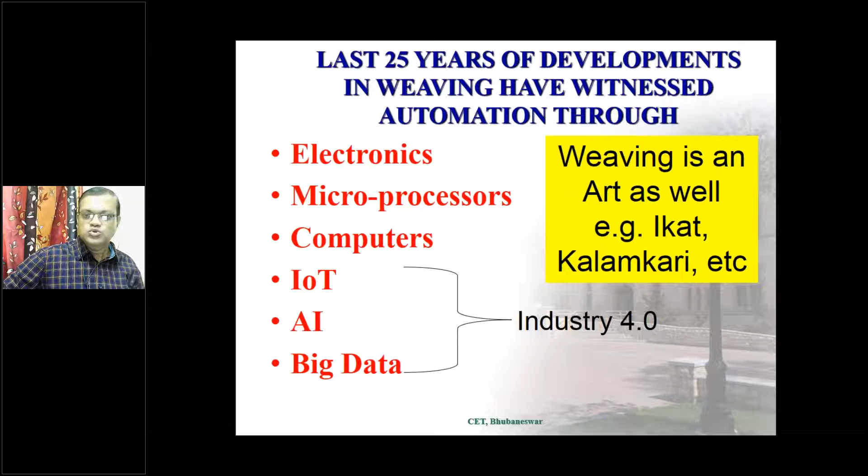We can see the classifications based on weft insertion system. Everybody, almost all the faculty members of textiles who are participating, they must have known it. Of course, the interdisciplinary faculty members should know what is the basic difference between shuttle and shuttleless weaving.

The first one is shuttle, and all the rest are projectile, rapier, air jet, and water jet. With advancement of technology, we have reduced the weight, reduced the noise, and come through the sustainable stage. Another classification is based on the source of energy to drive, that is power looms or hand looms. Power looms are again shuttle, projectile, rapier, air jet, and water jet. So obviously, when we consume power, we have to reduce the power requirement and increase the production.

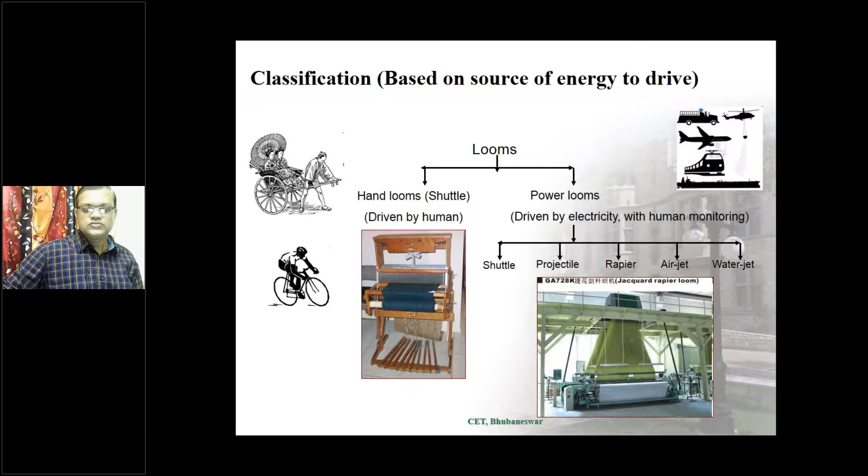This is the disadvantage of shuttle picking. That is the first step that came up in 1971 to make the system more sustainable, to reduce the weight, to reduce the energy consumption, to reduce the noise generation.

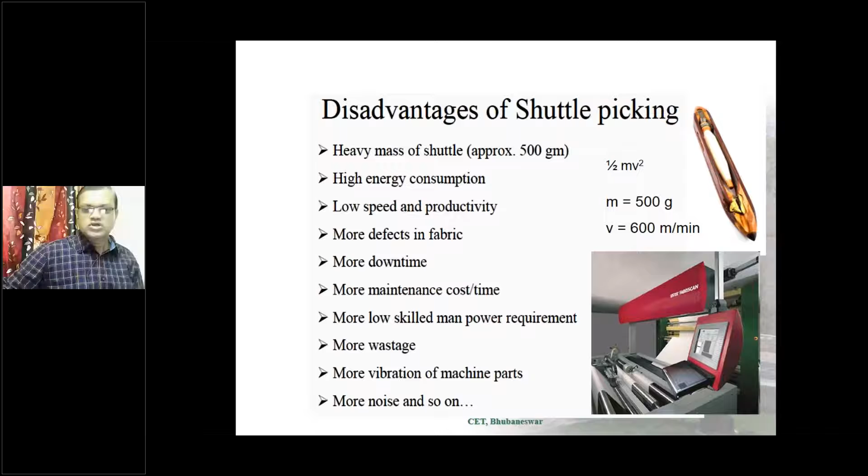So with all these disadvantages, the concept of shuttleless weaving came, which eliminated unnecessary movement, eliminated the movement of the weft package, and minimized the power consumption to improve quality of fabric and to improve the productivity.

This I have already discussed, and since a lot of things are to be discussed, I would like to skip it.

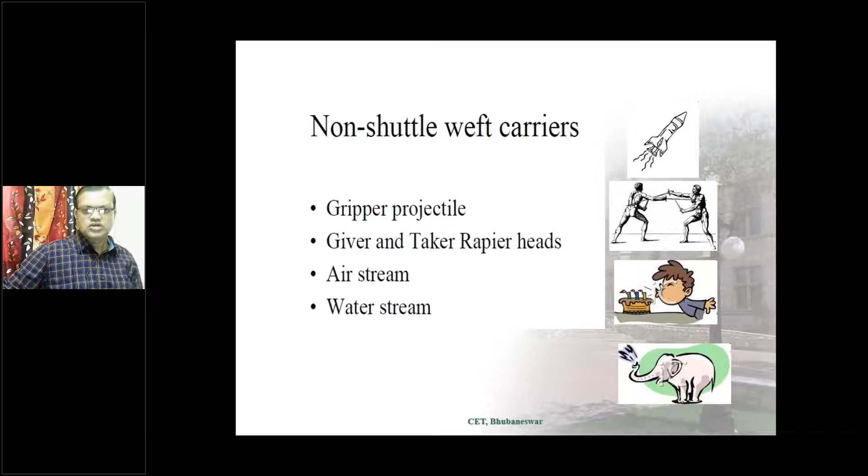The development of shuttleless weaving, we will see, started in 1971 for multi-phase, and commercial breakthrough came in 1998. However, for rapier, air jet, projectile, and water jet, the commercial breakthrough started somewhat around the 1950s to 1970s.

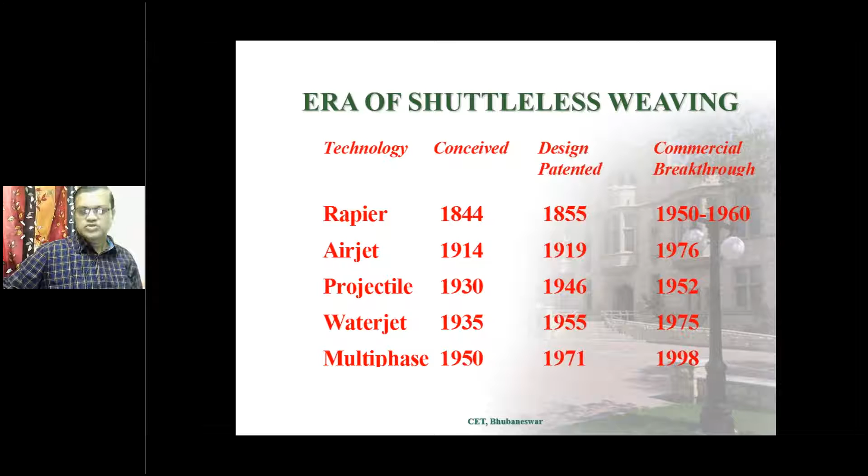These are the weft insertion rates, that is at what speed we are producing fabric, meaning the weft is inserted at how many meters per minute. You can see the highest WIR is achieved in multi-phase weaving, having 5,500.

But to the utter surprise, this multi-phase weaving has not become sustainable because of its inherent limitations of repairing of yarn in weft direction as well as warp direction. So multi-phase weaving, though highly productive and technology savvy, still has no takers because of its certain limitations in manufacturing of fabric.

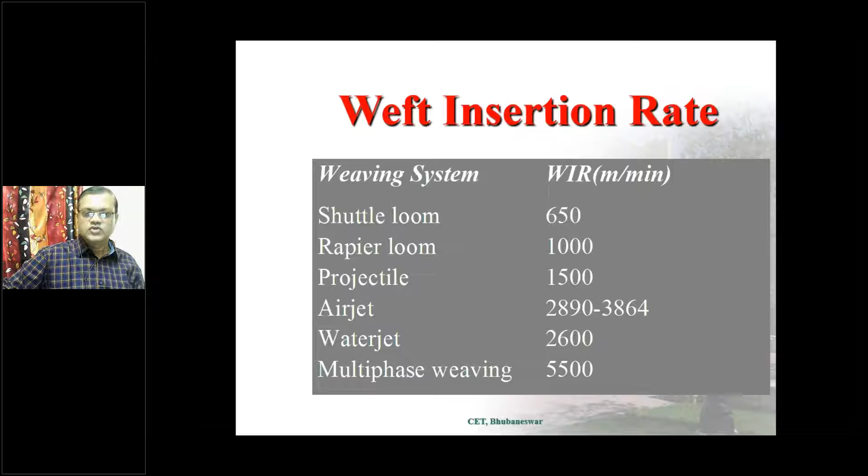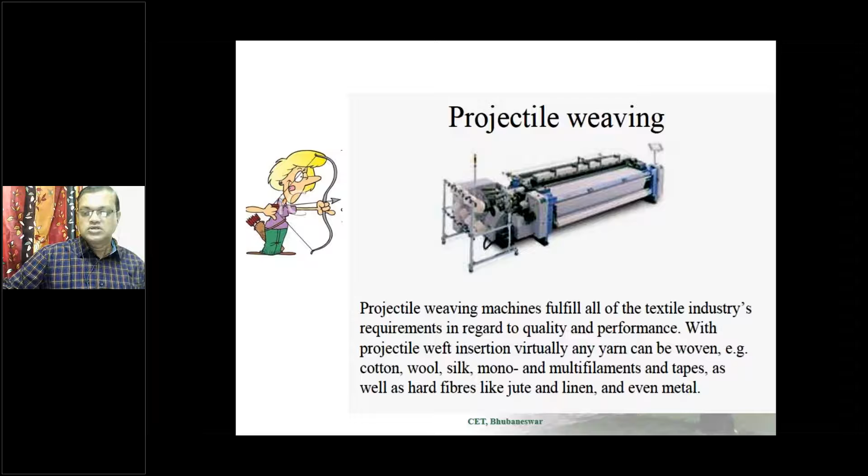The first breakthrough in shuttleless weaving came as projectile weaving. Projectile machines fulfill all the textile industry's requirements in regard to quality and performance. With projectile weft insertion, virtually any yarn can be woven, from finer to coarser, to spun, to filament, as well as tapes.

The projectile machine is characterized by good productivity level and high operational reliability. These types of machines are useful for weaving higher width fabrics and multiple fabrics having the same type of weft.

Projectile weaving is quite robust and technologically mature engineering. It gives the textile industry the following advantages: low power consumption, no material loss because we can produce any type of selvage, and the tucked-in selvage is its major specialty, top reliability, functionality, and ease of operation, low servicing and machine costs, and long-term retention of value through upgradation.

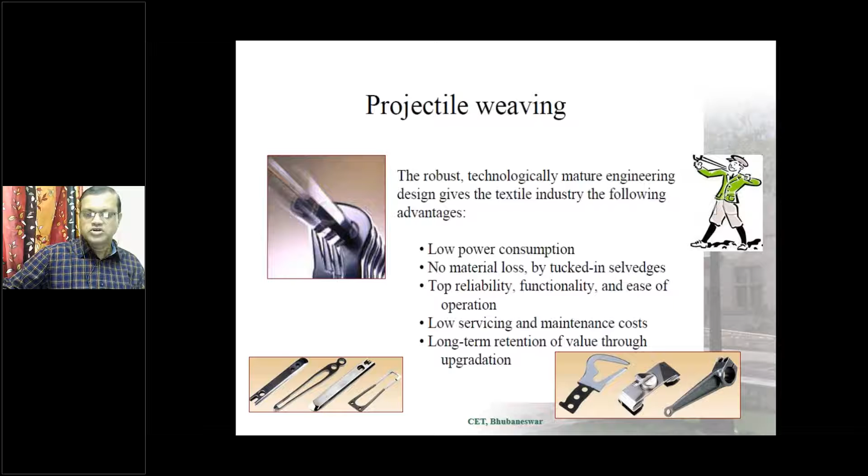These machines have been pioneered by Johann Jacob Sulzer, who took it from Switzerland in 1834, and they are the pioneers in producing these machines because they had patented the torsion rod mechanism with them. Sulzer is also known as a manufacturer of rail engines in Europe, so that technology upgradation was possible in Sulzer.

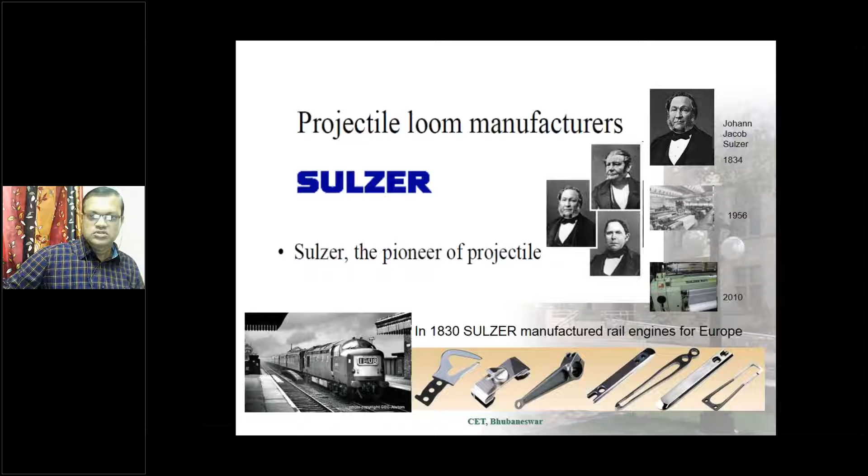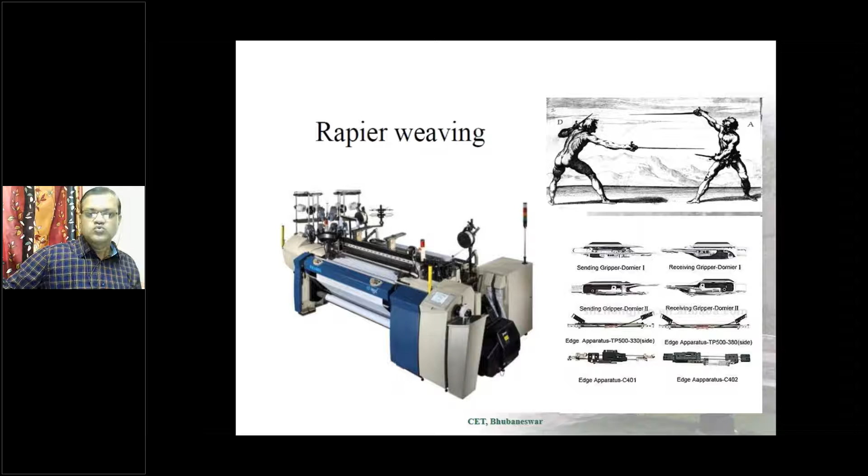The next versatile machine is rapier. As the name suggests, two rapiers, or two flexible or rigid swords, are used to insert the weft, and these are the most flexible machines. The application range covers a wide variety of fabric.

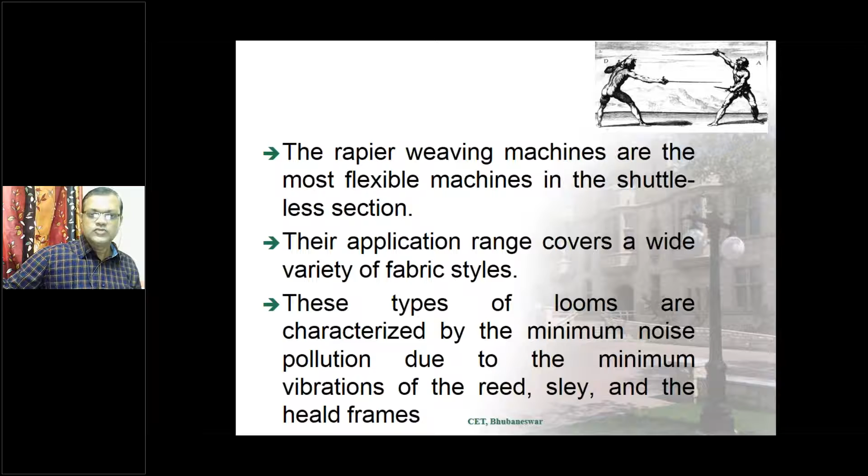These types of machines are characterized by minimum noise pollution due to minimum vibration of the reed, sley, and the heald frames. You can see these are the rapier heads. Nowadays, the rapier heads are being manufactured from carbon fiber to reduce their weight and improve their life, so they are not made by metals, but rather through fiber reinforced composites.

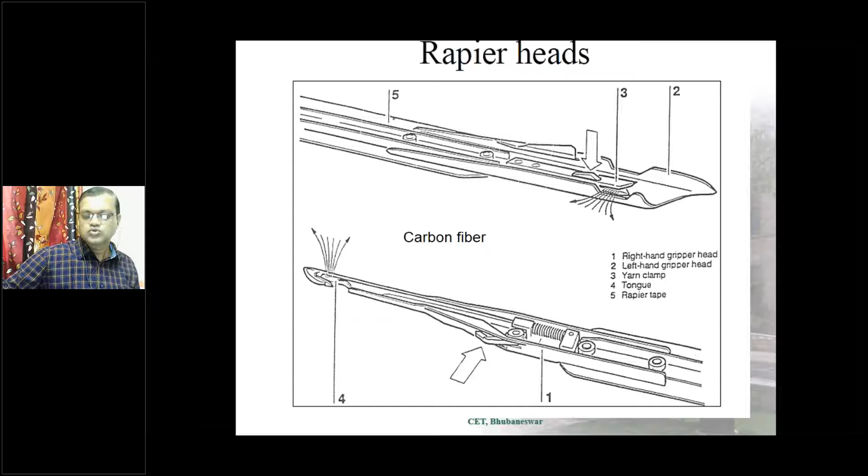These are the leading market players or manufacturers in case of rapier looms, that is Dornier, Somet, Picanol, Sulzer, Vamatex, and Jacob Muller.

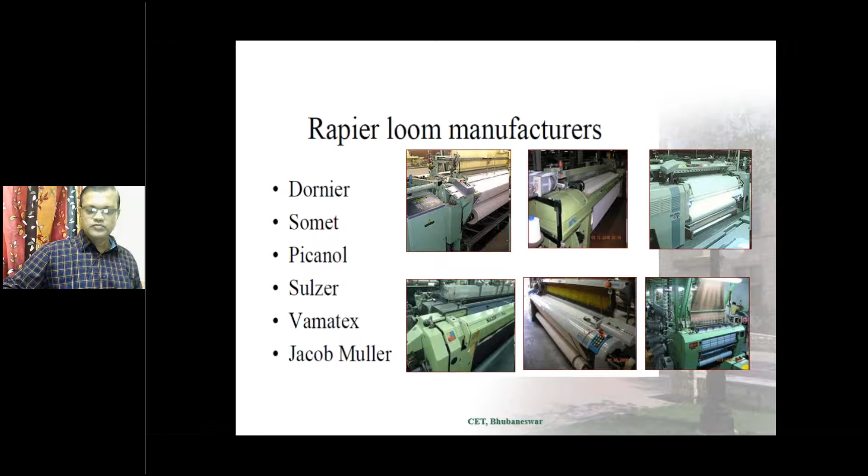The third category in case of shuttless weaving is air jet. As the name suggests, the weft is inserted by the blow of air. These weaving machines are characterized by the highest weft insertion rate and considered the most productive in manufacturing light to medium weight fabrics, preferably made of cotton and certain man-made fibers, such as sheets, shirting fabrics, linings, taffetas, and satins in staple yarns of man-made fibers.

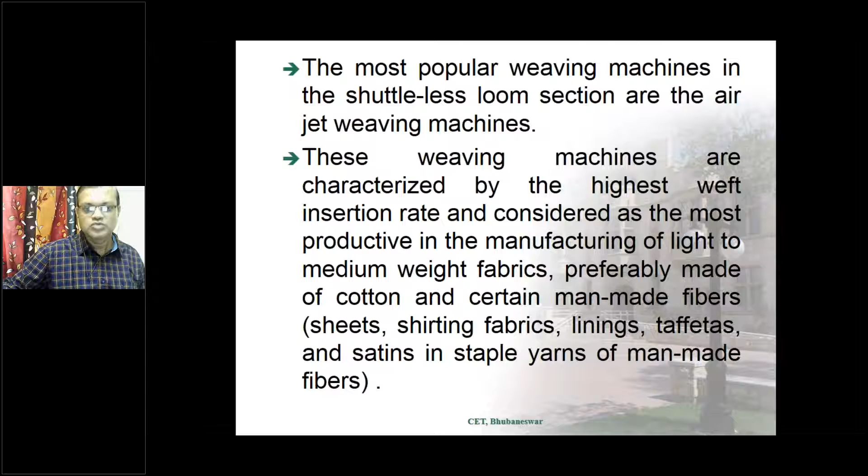Deliberately, I have used large fonts because many times the participants take part through their mobile phones. I also attend many webinars and seminars through mobile phones and it is not visible. I hope it will be clear to them.

Air-jet machines can also be used for the production of heavy weight fabrics like denims as well as terry fabrics. These machines are preferred for manufacturing bulk quantities having customized fabric style. The weaving width varies from 190 to 400 centimeters, and it can use up to 8 different colors for weft direction.

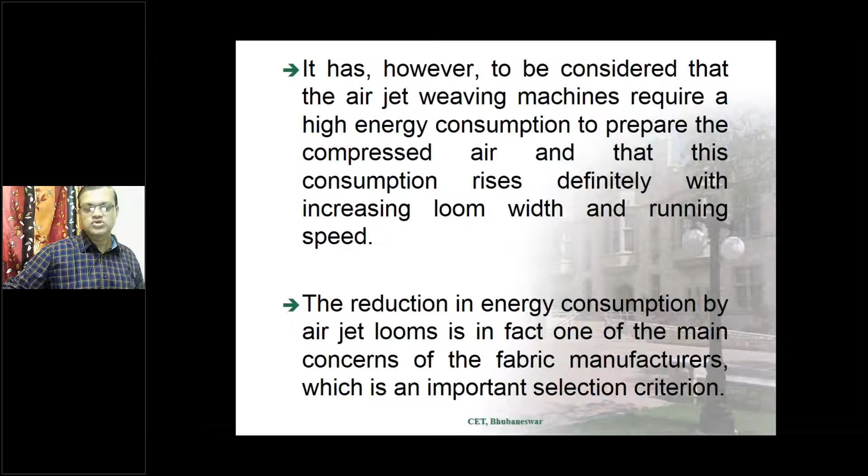It has to be considered that air-jet weaving machines require high energy consumption to prepare the compressed air to be blown, and this consumption rises with increase in loom width and running speed, because we use compressed air. So energy requirements are on an upward moving slope with increase in speed as well as width of the fabric. The reduction in energy consumption by air-jet looms is in fact one of the main concerns of fabric manufacturers. We'll discuss this later, as it is an important selection criteria.

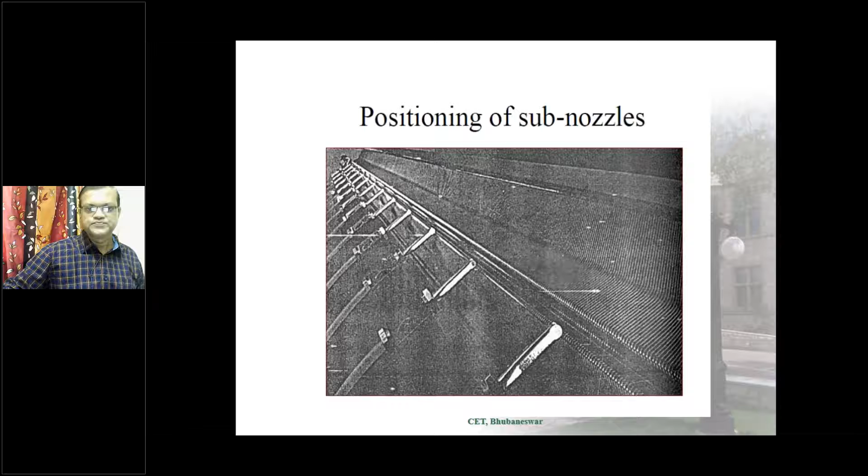So you can see this is the positioning of subnozzles. Nowadays some improvements have been made in the reed profile as well as the subnozzle aperture to reduce air consumption and thereby reduce energy requirement. Major manufacturers for air-jet machines are Sulzer, Tsudakoma, Picanol, Toyoda, Dornier, Somet, and Muller.

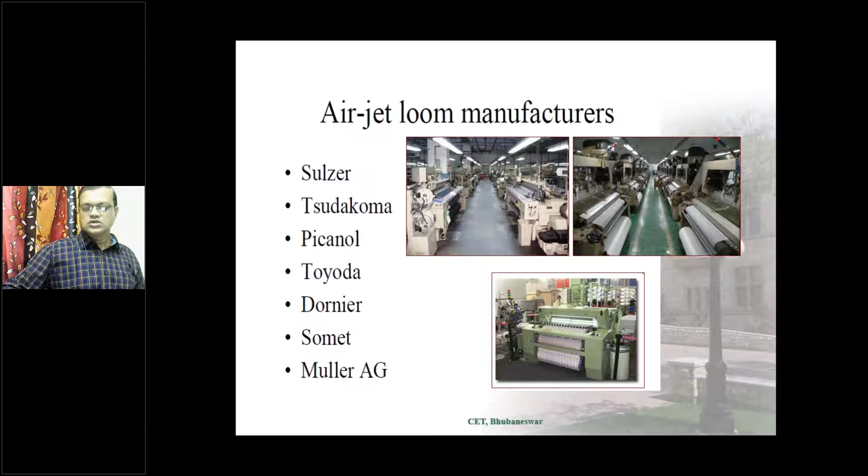This is the fourth category in shuttless weaving, that is water jet. The jet in this particular machine is made by flow of water. Water jet looms are used for the manufacture of light and medium weight fabrics with standard characteristics and hydrophobic fibers such as nylon and polyester. These machines are primarily used for weaving multi-filament synthetic yarns. These looms are characterized by high weft insertion rate and low energy consumption.

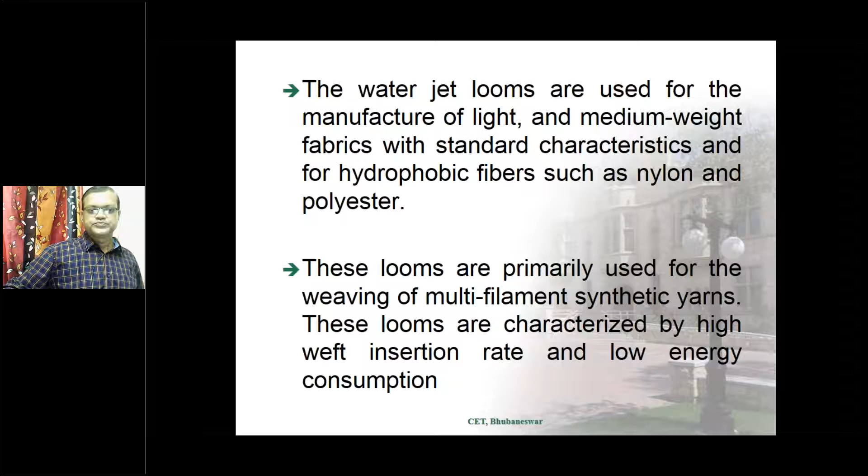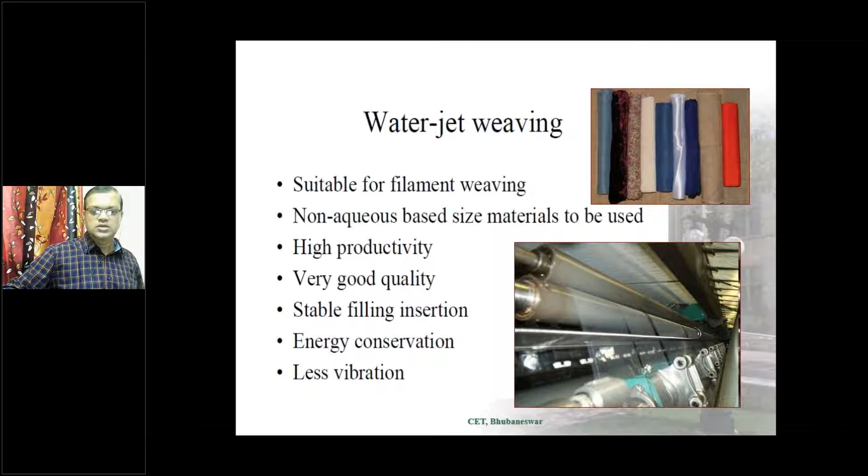These are basically suitable for filament weaving, and have properties of stable filling insertion and less vibration. Tsudakoma, Toyota, Nissan, and Alitex are the major manufacturers of water jet machines.

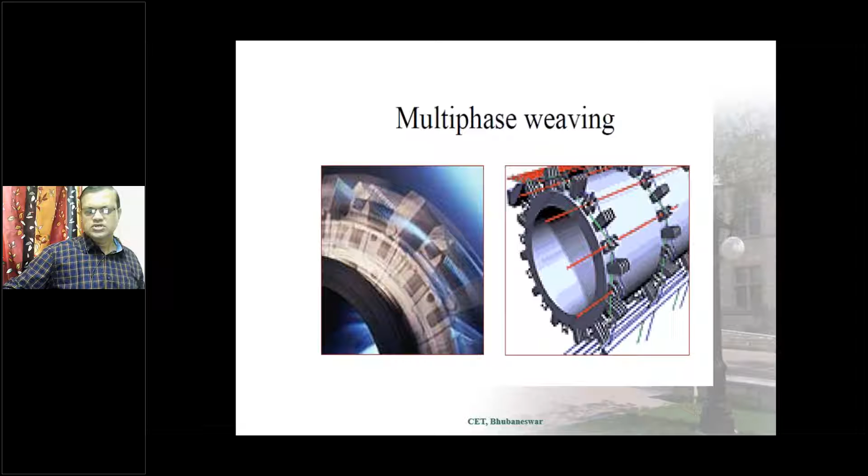Yes, this was the machine I was talking about initially, that is multi-phase weaving, where multiple wefts can be inserted simultaneously. The manufacturer is Sulzer.

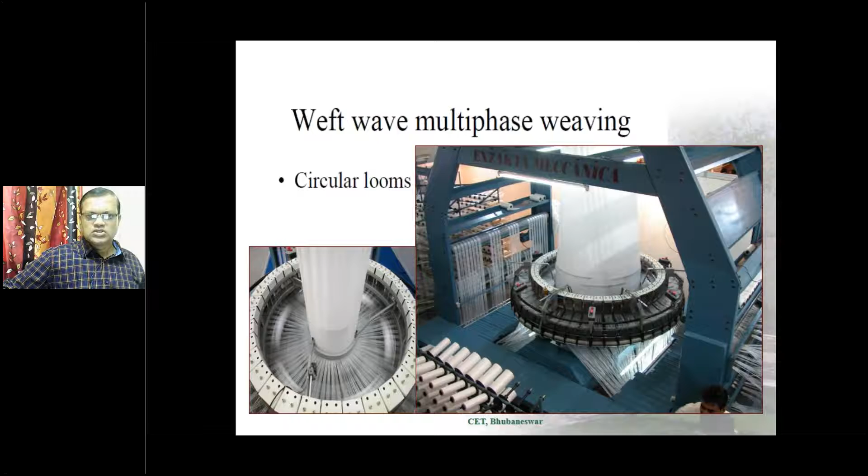Another version is weft wave multi-phase weaving or circular looms, which looks somewhat like this. The concept of multi-phase weft insertion started in 1955. These types of looms are based on multi-shed formation during weaving, which can be achieved by two basic techniques, namely wave shed and multilinear.

Multi-phase looms are unable to gain success due to inherent shortcomings such as difficulty in repairing mispicks and difference in weft tension. That's why, though they are highly sustainable and very low power consuming per unit production, they are yet to crack in the market.

Coming to the main issue, that is sustainability. We have three Rs: reuse, reduce, and recycle. In weaving mechanism, there is very little scope for reuse and recycle. However, we can address sustainability if we try to reduce energy, noise, and waste. These are the three major polluting or unsustainable factors related to modern weaving or fabric manufacturing.

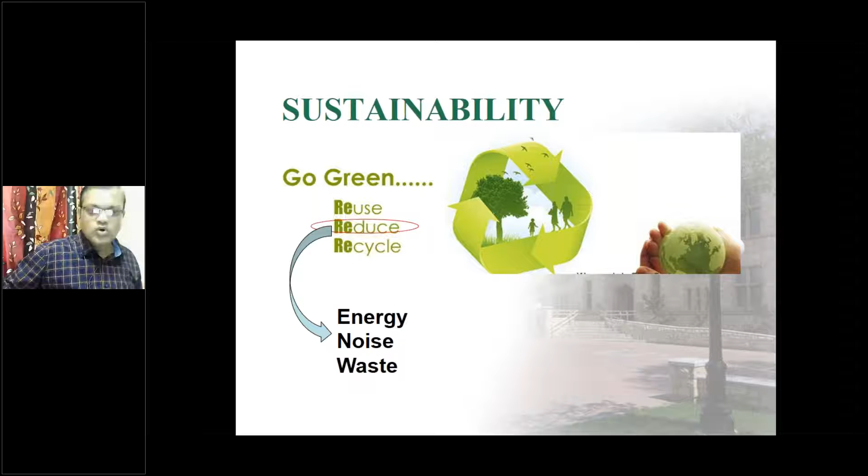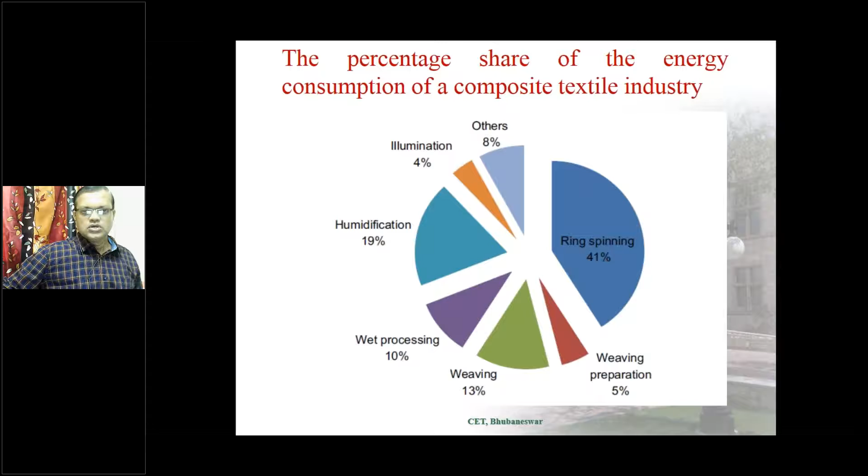If we combine preparation, it is still around 18%. So energy is used for operations in compressors for supplying compressed air for winding, warping, sizing, and looms, which are part of the preparatory process.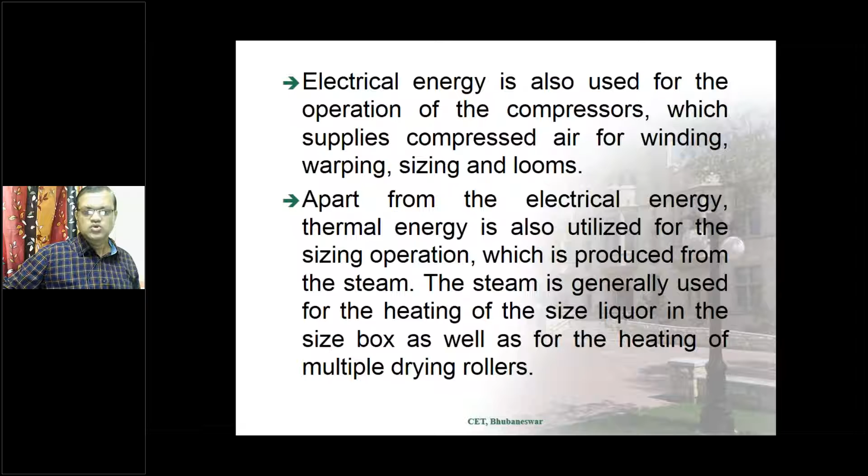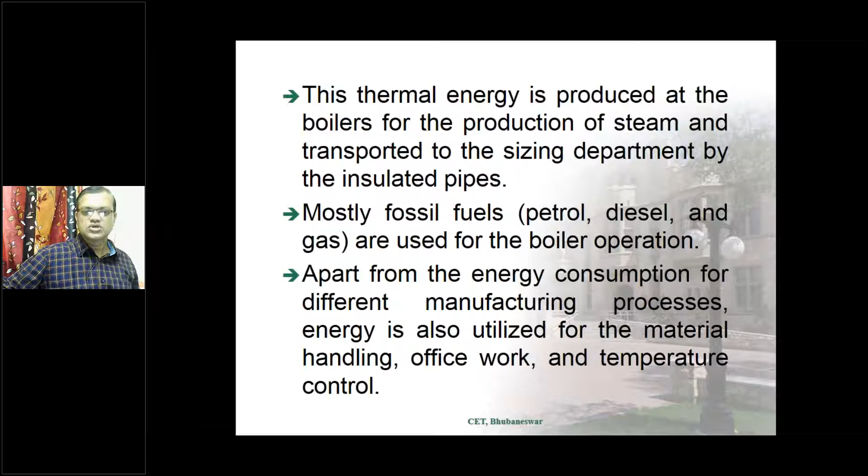Apart from electrical energy, thermal energy is also utilized for the sizing operation, produced from steam. The steam is generally used for heating size liquor in the size box as well as for heating multiple drying rollers. This thermal energy is produced at boilers for production of steam and transported to the sizing department by insulated pipes. Mostly fossil fuel, that is petrol, diesel, or gas, is used for boiler operation. Apart from energy consumption for different manufacturing processes, energy is also used for material handling, office work, and temperature control in the weaving industry.

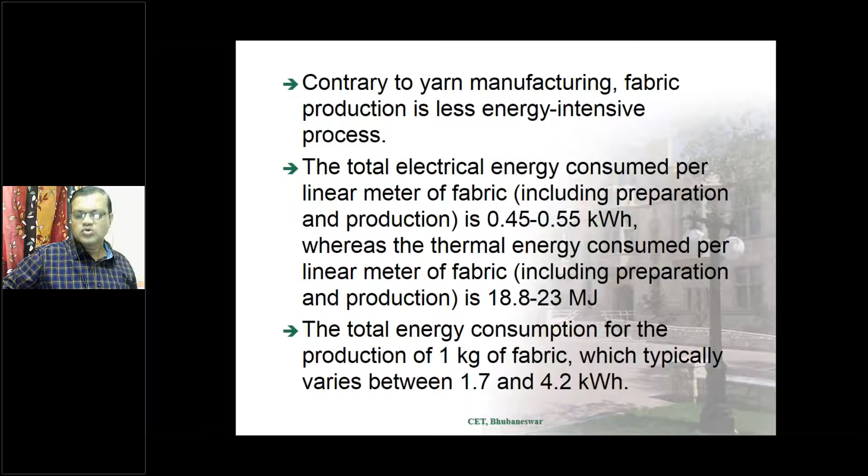The typical energy consumption pattern for different motions in a rapier loom with 8 heald frames - I have taken rapier, but for almost all machines it is more or less the same. 60% of the energy is used in picking. So if you can reduce the energy consumption in the picking system by any modification, by lubrication, by maintenance, by use of new material, then you are going to save a lot of energy. Shedding is 17%, and beating is also around 19%.

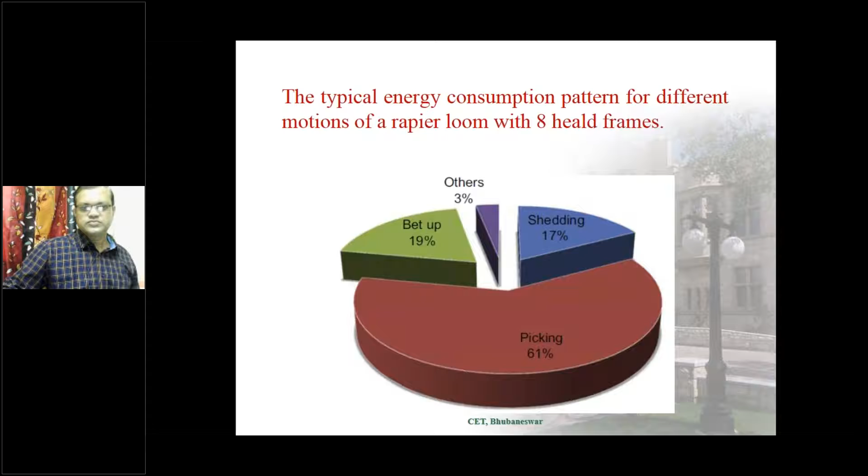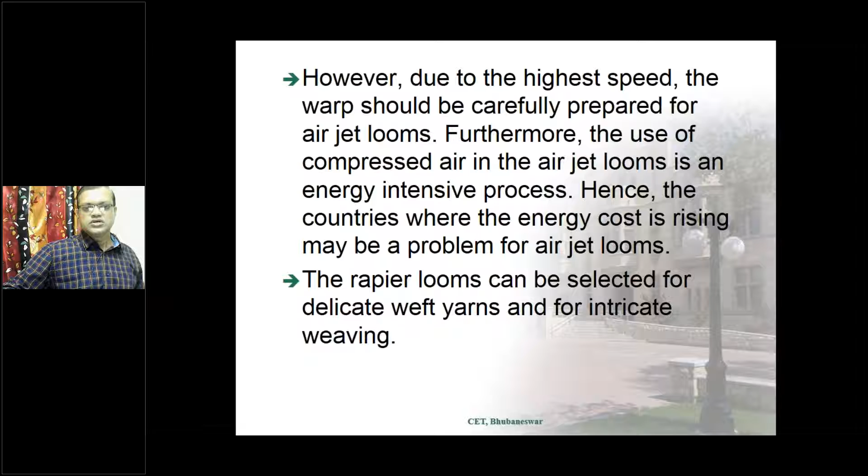Among the shuttleless weaving machines, air jet, rapier, and water jet looms are the most widely used for manufacturing. Air jet machines are considered more sustainable than others due to their high weft insertion rate, as a result of which production shoots up and the cost of production dips down. However, due to the highest speed, the warp should be carefully prepared for air jet looms. Furthermore, the use of compressed air in air jet looms is an energy intensive process. Hence, in countries where energy cost is rising, it may be a problem for air jet machines to survive.

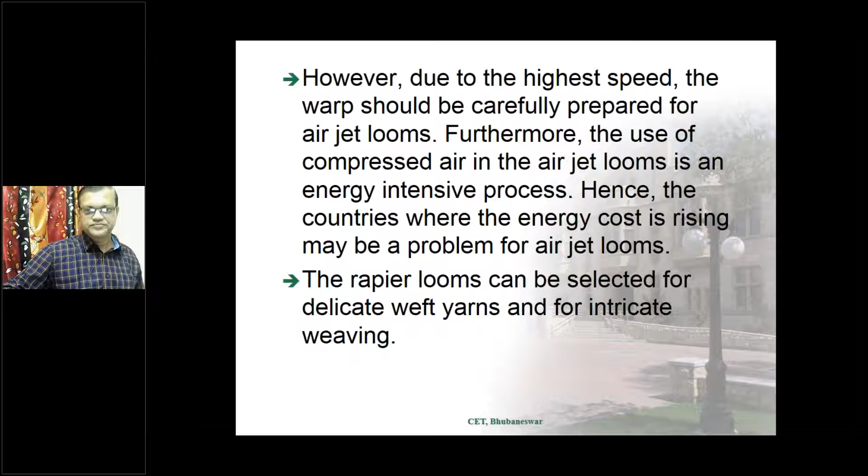Rapier looms can be selected for delicate weft yarns and for intricate weaving. Although projectile machines can give high WIR similar to rapier looms, they have some limitations in number of weft colors and weft tension. Also, the type of machines manufactured by Sulzer suffer from high initial cost, as a result of which nowadays they have become obsolete.

Multiphase machines can weave fabric at the highest WIR. However, limitations in the design of the looms have not made them commercially successful.

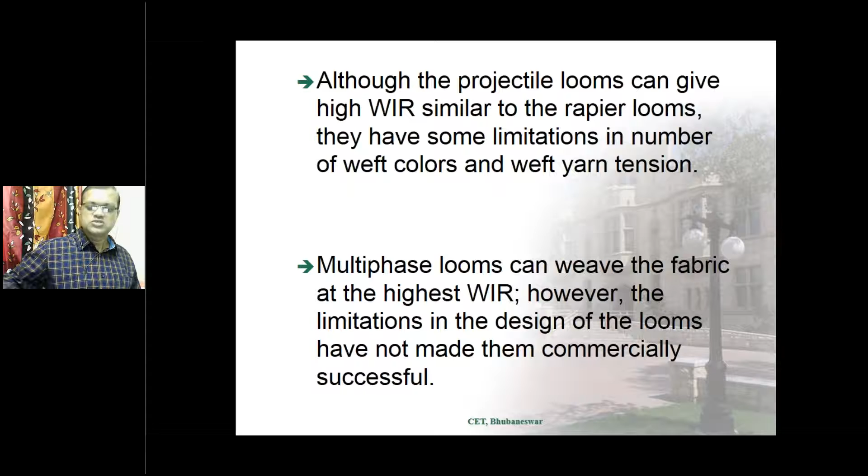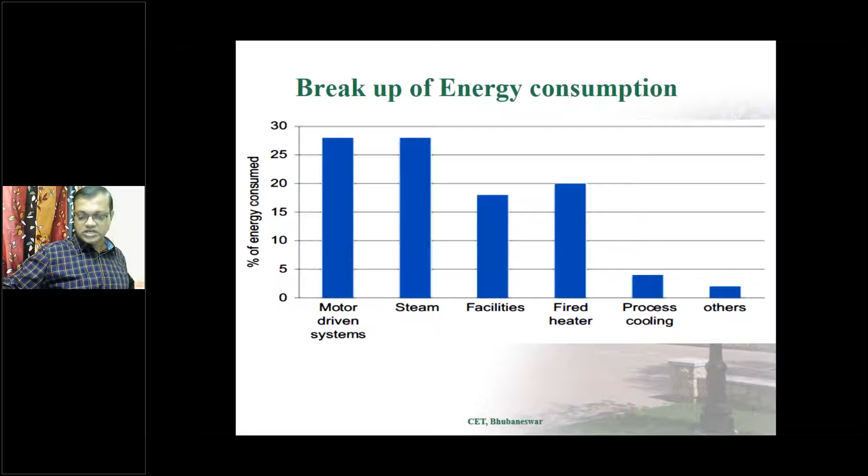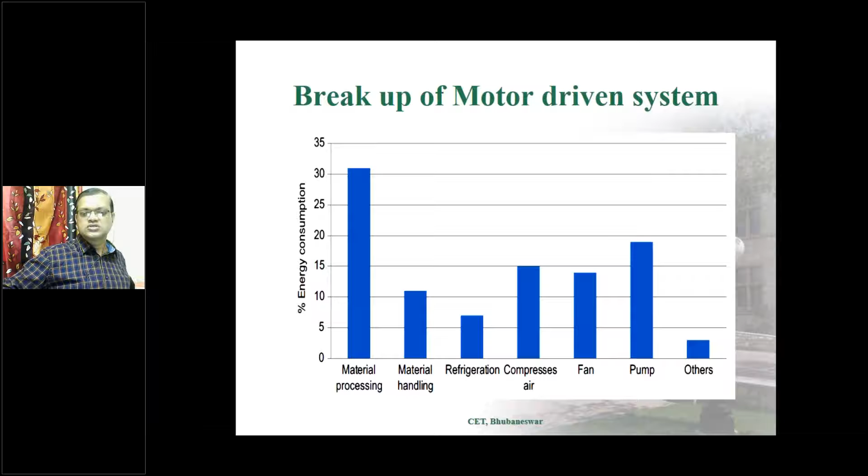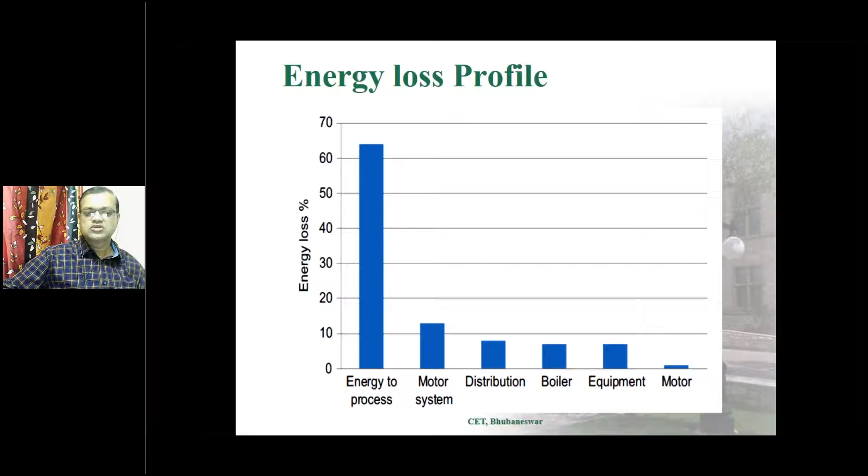The energy consumption in weaving can be reduced, or sustainability can be achieved, by making the process more efficient with regular care, maintenance, cleaning, and efficient driving systems. Reducing the waste yarn generated during the weaving process can help to improve sustainability. The weaving process can also be made more sustainable by effective driving systems and increased productivity. Any step during the weaving process to reduce energy consumption increases process efficiency and productivity, which can help to achieve sustainability.

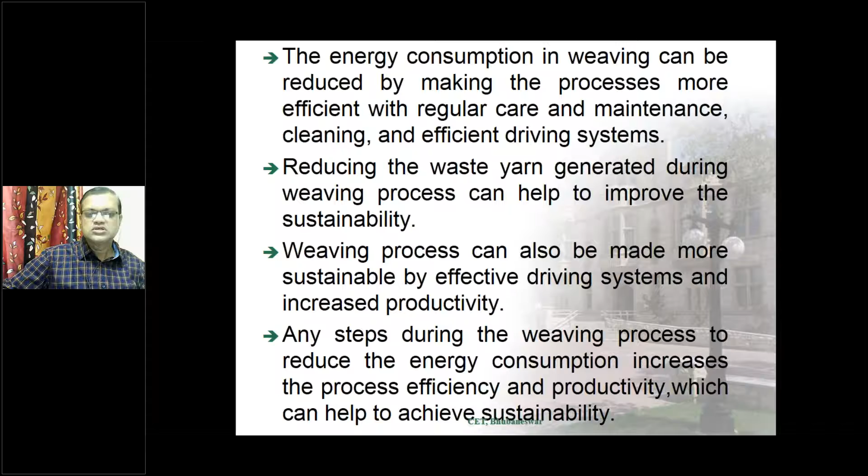From the above discussion, it is evident that energy is one of the prime factors influencing cost. Hence, energy efficient technology in fabric manufacturing can help in sustainable production. We'll see what developments have taken place in the last couple of years. New weaving technologies such as projectile, rapier, air jet, water jet, and multiphase machines consume lower energy and give better efficiency compared to conventional machines. Switching to newer weaving systems or technologies is a major step to achieve sustainability.

The second part next to energy is noise. In addition to high energy consumption, the other major environmental problem in weaving is noise pollution. In fact, the weaving process is the step in the whole garment production which generates the highest level of noise pollution. We'll see the table in subsequent slides.

The vibration of the mechanical parts of the machine is the major source of noise. The rotating and reciprocating movement of elements of weaving like sley, heald, and picking system have kinetic energy and share it to other machine elements through bearings, and a majority of this energy is dissipated as noise.

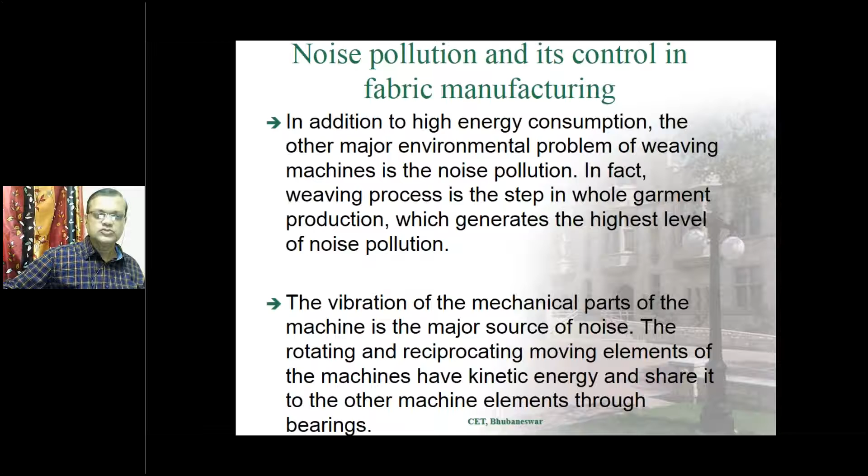So how can it be controlled? Machine elements like shafts, gears, pulleys are mostly rotating in nature, whereas reed, sley, heald frames are mostly reciprocating. These moving parts of the machines are usually the main source of vibration, which are then transmitted to other parts of the machine.

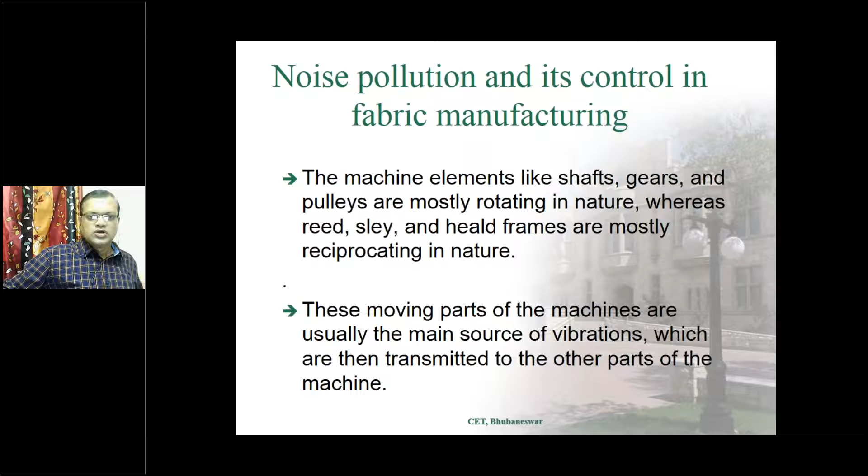So this we have already discussed. This is the table I was talking about, that is the noise level production. In shuttle looms it is around 90 to 115, in projectile it is 85 to 100, in rapier it is 80 to 100, air jet 90 to 100, and water jet 80 to 95.

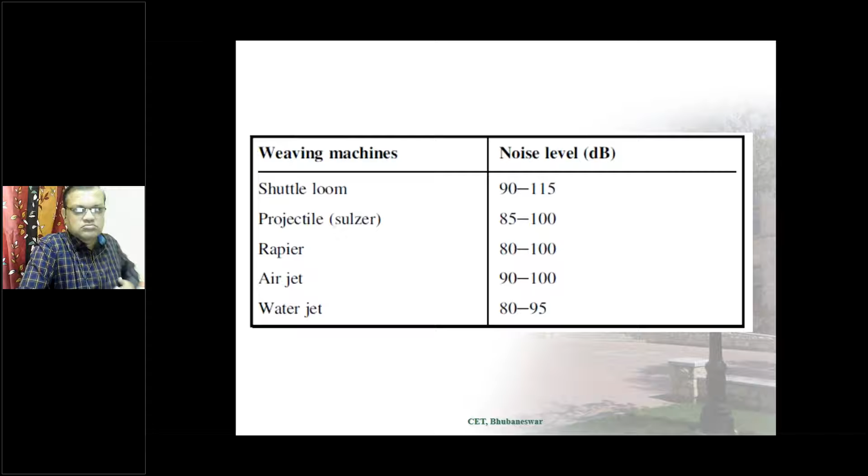I would like to share one experience I gathered during my visit to one of the leading textile industries at New Pravadevi, Mumbai. It is Bombay Dyeing Spring Mills. It was having almost 1008 machines, all shuttle looms in one shed. When I entered into the shed, immediately I came out because I never got exposed to such a huge shed before. It was making huge noise.

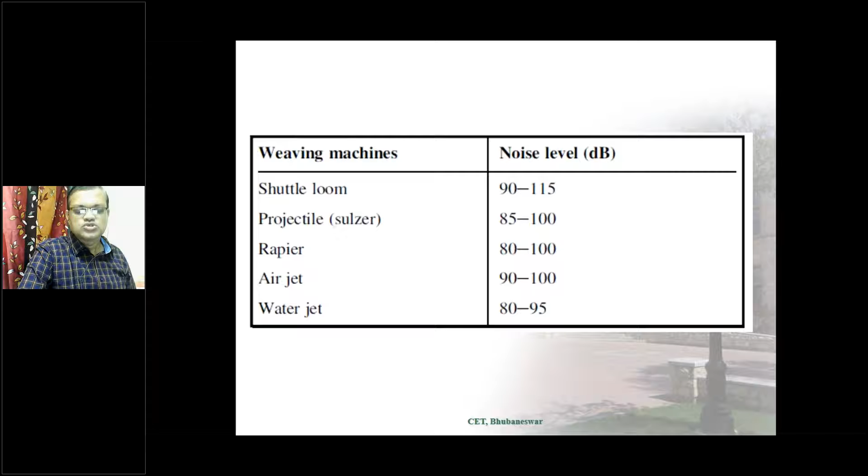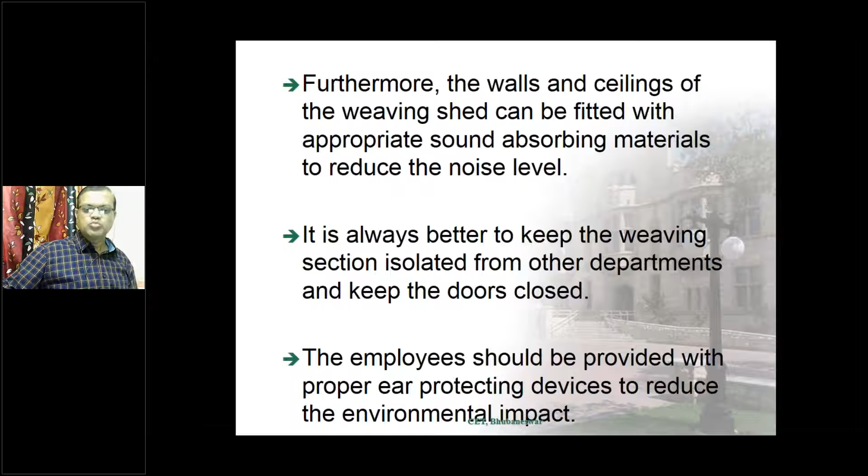So those noise levels can be reduced by use of shuttleless machines. Furthermore, the walls and ceilings of the weaving shed can be fitted with appropriate sound absorbing materials to reduce the noise level. Also, it is better to keep the weaving machines isolated from other departments and keep the doors closed so that noise is not polluted and not disturbing to others. Employees should be provided with proper ear protecting devices to reduce the environmental impact.

Although reducing the operational speeds can help reducing the noise level, productivity will be reduced. The use of electronic devices and mechanisms instead of mechanical devices also can help reducing noise level.

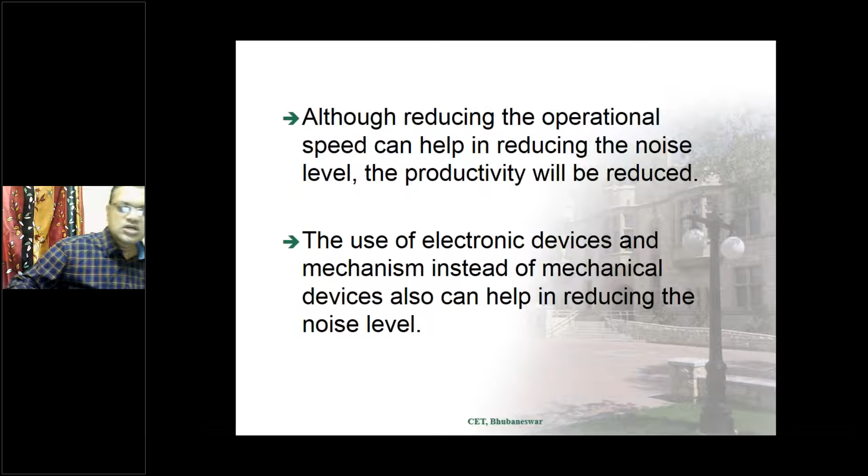The third in the category of reduction is waste. The more you use, the more you generate waste. So solid waste generation is becoming a serious issue nowadays. The major source of solid waste is caused after the end of the life cycle of the fabric, of the apparels. These are abandoned apparels which go up to the landfills.

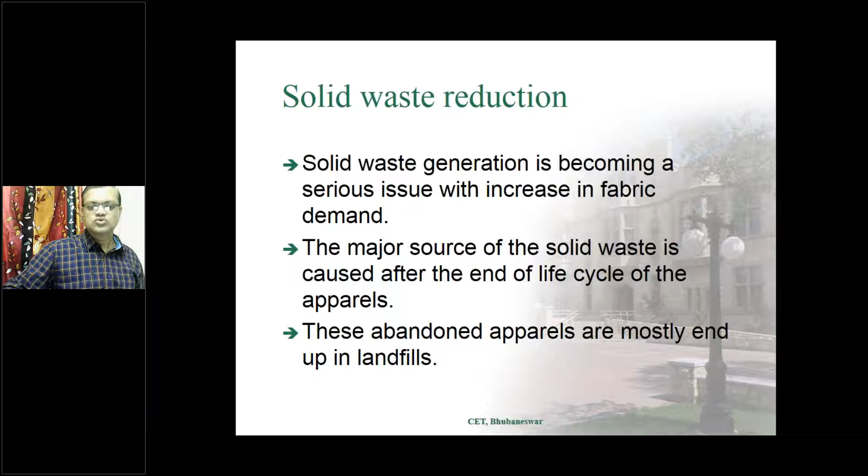The other source of solid waste is the process waste or pre-consumer waste generated at every stage of fabric production. This solid waste can be reused as low quality textile products after recycling. There is an ever increasing effort to reduce the process waste in order to reduce the cost of production.

So here one thing I would like to tell, it is my personal experience that with growing age and growing fashion, people use more number of garments, more number of apparels, and generate more waste. We are listless when we purchase apparels or upholsteries or home textiles during festive seasons, and I feel very few people of us really want to reduce the use of apparels, reduce the use of upholsteries and home textiles, which also gives rise to much solid waste because people nowadays are fashion prone.

So every day people buy new garments, use it, throw it. Where does it go? To the landfills, and also to manufacture that particular piece of apparel or fabric, we require huge amounts of energy and ultimately pollute the atmosphere.

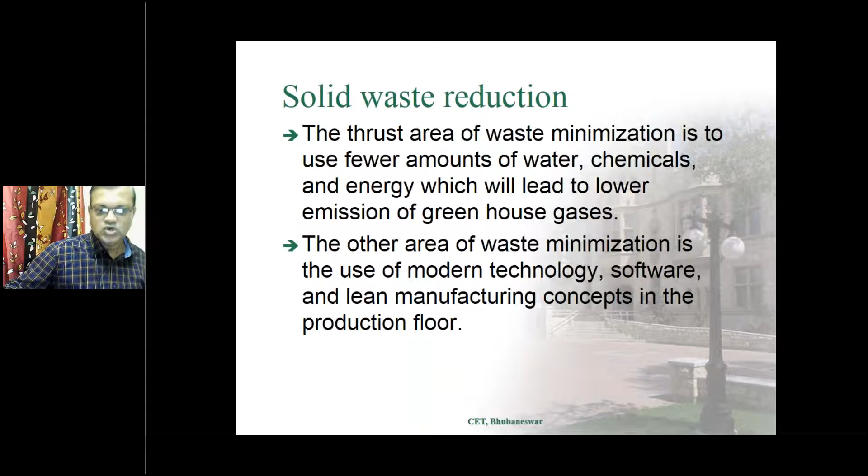The other area of waste minimization is to use modern technology, software, artificial intelligence, IoT, and lean manufacturing concepts on the production floor to reduce the waste.

The average waste related to warp in a weaving industry lies in the range of 2.5 to 4%. The warp waste is mostly found at the auxiliary selvage, at the shuttleless looms, warping machines, in the sizing zone, knotting, gaiting, tying in, and as weavers beam residues. So nowadays, automatic knotting and gaiting machines are taking speed, and they are of more interest in ITMA in 2019 as well as 2015.

It was observed that the warping waste accounts for about 85% of the total warp waste, and all other warp waste accounts for only 15%.

The alternate method of fabric production, that is knitting technology, produces less waste as compared to weaving technology. So if we can switch to knitting technology, which is almost accounting for almost 35% of the world production nowadays, it generates less waste as compared to weaving.

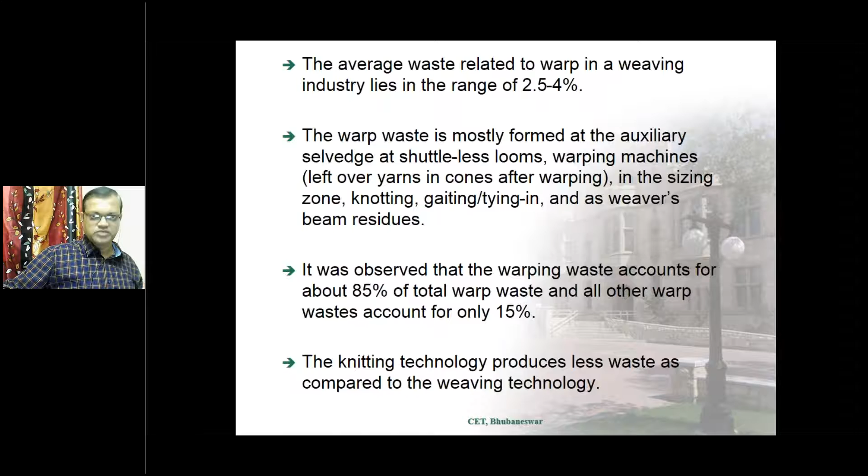We'll discuss some recent developments which are steps towards sustainability in the last decade, or couple of 5 to 7 years. One example is the OptiMax-i 8-J 190 with free flight positive gripper, exhibited at ITMA 2015 in Milan.

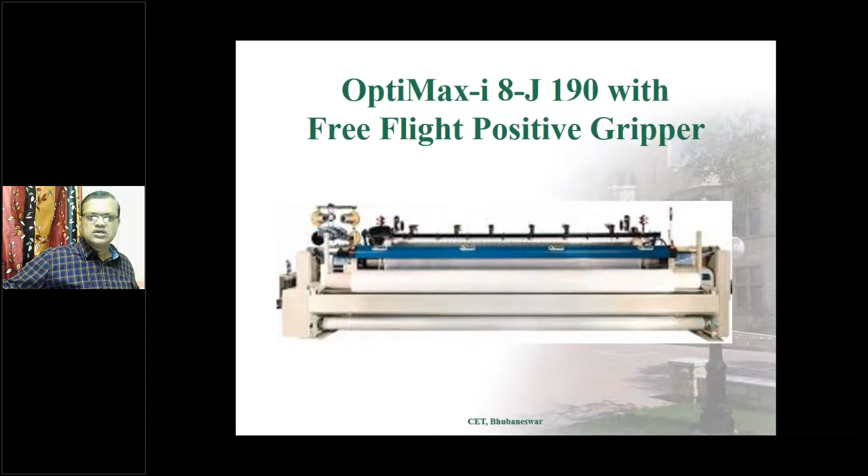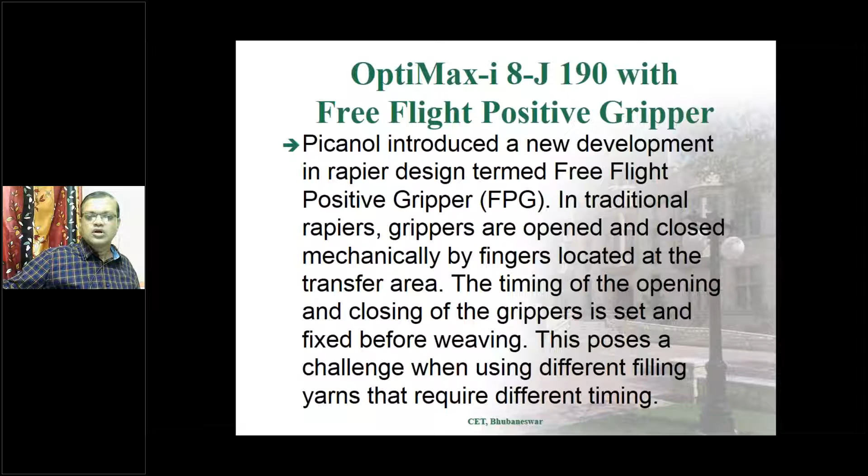Picanol introduced this new development, the free flight positive gripper. In traditional rapiers, grippers are opened and closed mechanically by fingers located at the transfer area, and the timing is set and fixed before weaving. This poses a challenge when using different filling yarns that require different timings, requiring different machines. But with the free flight positive gripper, the timing of opening and closing can be optimized to work with different yarns.

In the same machine you can process more sorts, a matter that otherwise requires time and leads to loss of production. The opening and closing of the FPG gripper are controlled electronically and can be timed differently for each filling type, providing new opportunity to mix virtually any combination of filling yarns in the same fabric.

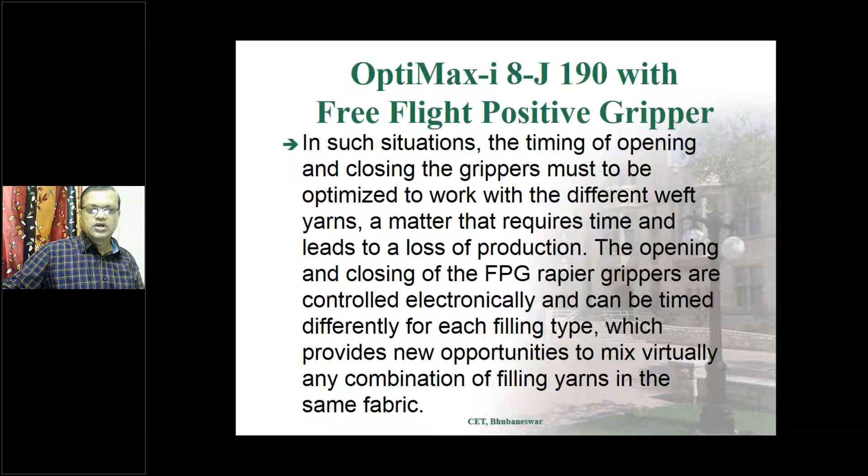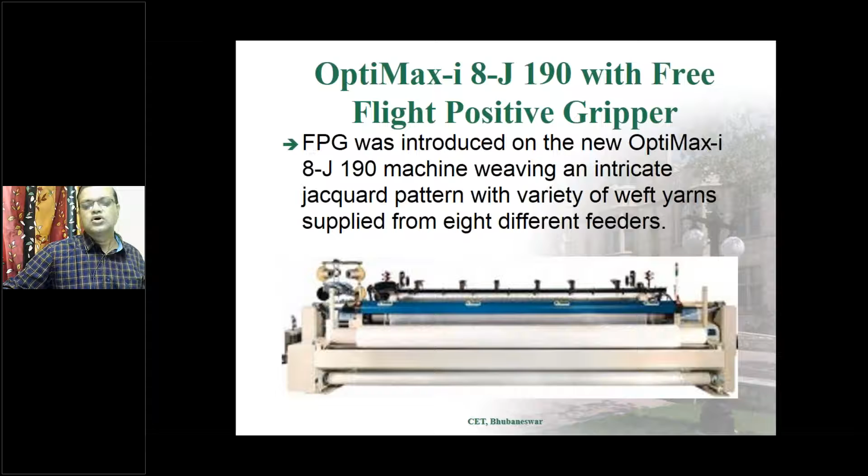This free flight positive gripper was introduced on the new Optimax machine, with an intricate jacquard pattern using a variety of weft yarns supplied from 8 different feeders. So it can cater to the needs of any kind of checks or stripes in the weft direction as well.

In terms of air consumption reduction, Toyota engineered a new relay nozzle design with an optimized tapered angle for lower air pressure. The new profiled E-reed also reduces air pressure. Its design allows the relay nozzles to be set closer to the reed, as a result of the reduction in dimension of the bottom portion of the reed blades.

The closer setting makes the air blowing on the weft yarn more effective with less energy dissipation. So less air is lost and more energy is transferred to the weft by friction, by which the weft is passed from one end of the machine to the other.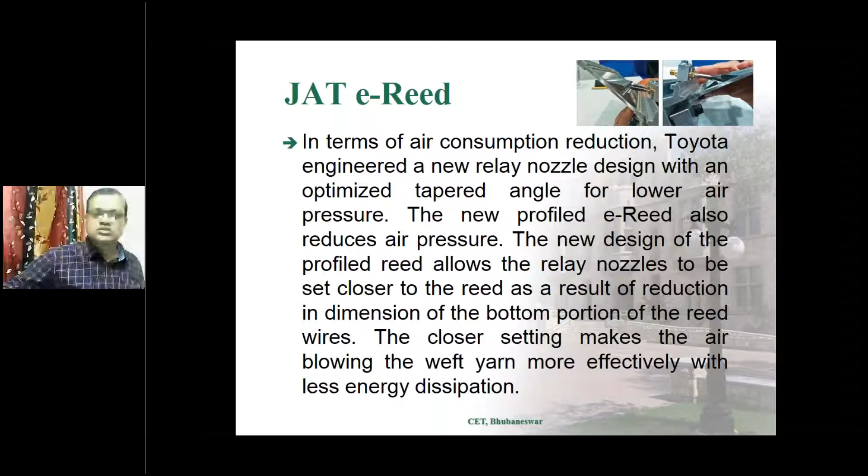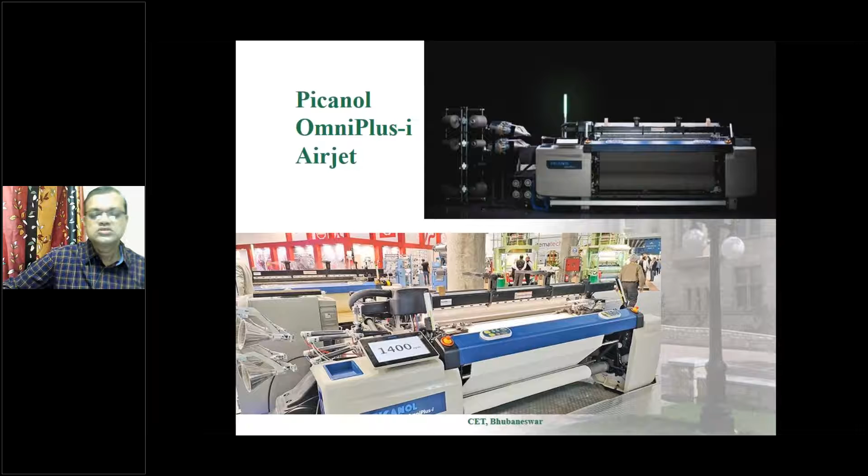The third invention to focus on is the Picanol Omni Plus I air jet machine, which has four important features.

The first is smart performance. Picanol machines have always been built for maximum performance, and this will always be the case. Nevertheless, smart performance focuses on ensuring the highest industrial speeds in the market, even under difficult conditions. Picanol has realized this in the new Omni Plus I machine thanks to a completely new reed motion, whereupon more insertion time permits smooth handling of even less than perfect yarns.

So the new reed, which allows more insertion time, means you use less energy for insertion because you are left with more time.

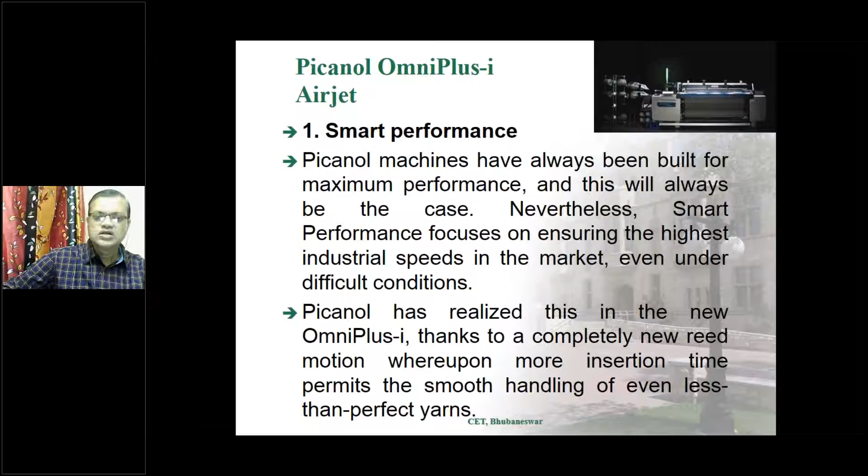Second is sustainability. The reduction in energy consumption is not optional in this machine; it has to be embedded in the machine design. With its modified relay nozzle distance, the new Omni Plus I offers more stable insertion and consequently new possibilities for further reduction in air consumption, even through automated algorithms. In other words, sustainability is inbuilt with this machine.

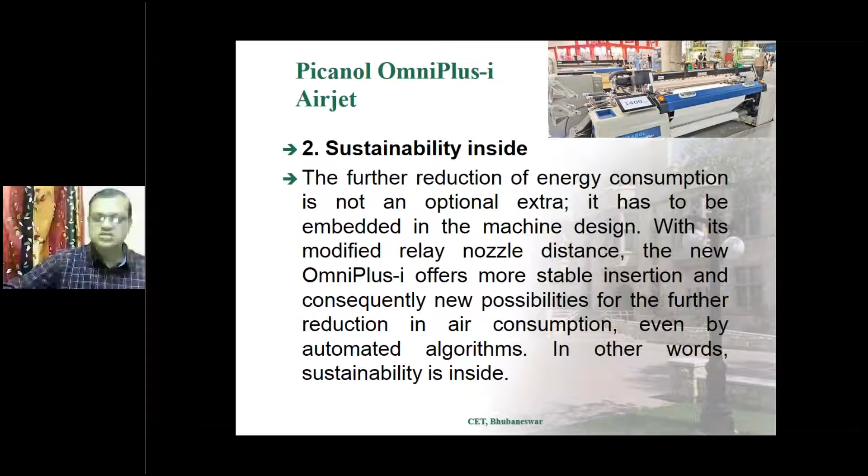Third is driven by data. SmartShed is an attachment software available on the machine, a fully electronically controlled shedding motion incorporated in the new Omni Plus I, which is a logical step in this evolution. Together with abundant use of sensors, this generates data that fuel real-time optimized algorithms and promises further gains in productivity when combined with data from other machines. Therefore, weaving with Picanol truly becomes driven by data.

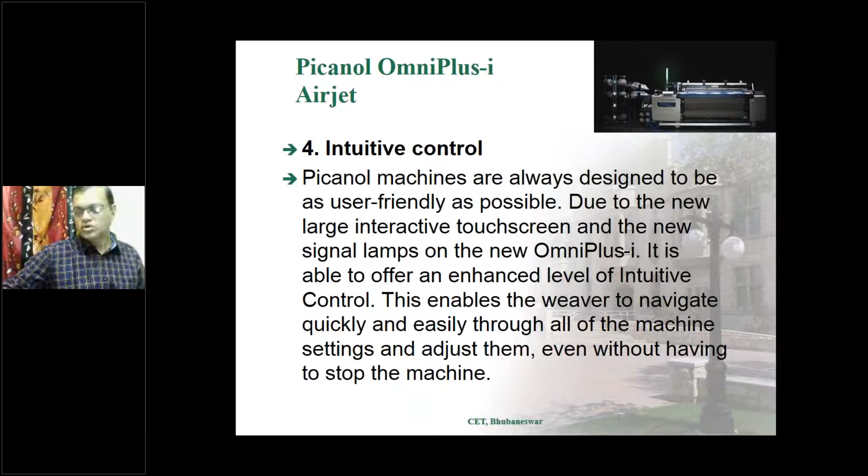The fourth feature is intuitive control, designed to be as user-friendly as possible. Due to the new large interactive touch screen and signal lamp, the new Omni Plus I offers an enhanced level of intuitive control. This enables the operator to navigate quickly and easily through all machine settings and adjust them without having to stop the machine, reducing manpower requirements, so fewer operators can run a higher number of machines.

This is one of the developments that manufacturers are also venturing into: 3D weaving. What is 3D weaving? Till today, we have known weaving only in the 2D direction, meeting the requirements of the apparel industry.

However, with the development of fiber reinforced composites or textile reinforced composites, we thought of developing three-dimensional fabric, using sometimes 3 or sometimes 4 different types of yarns in different axes. This is the structure of the 3D fabric that I developed during my PhD dissertation at IIT Delhi.

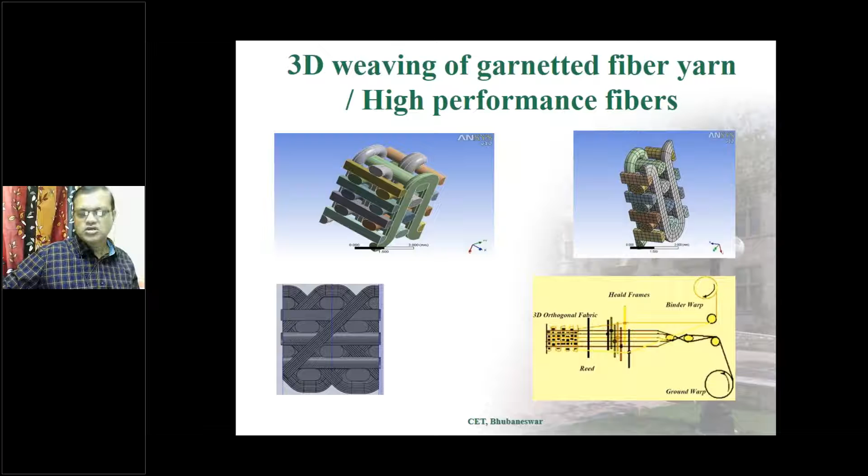You can see the yarns are disposed in 3 different directions, and the fabric generated is used for preforms for composite manufacturing, which can eliminate the process of laying, forming, or joining, which sometimes lead to breakages.

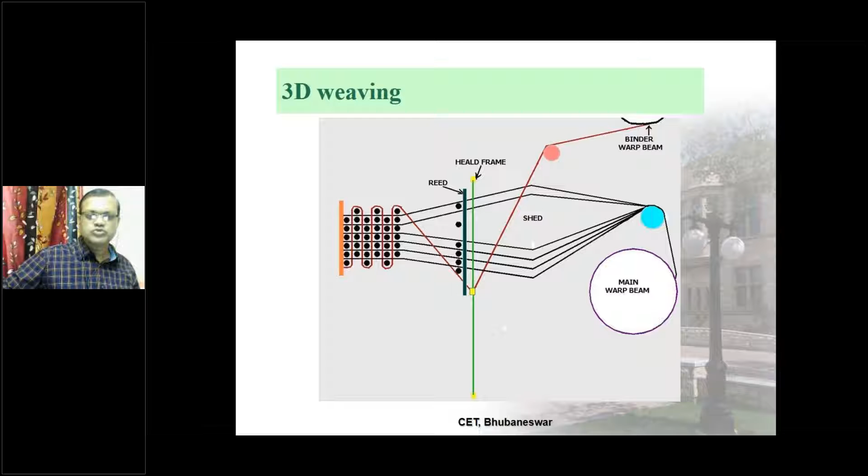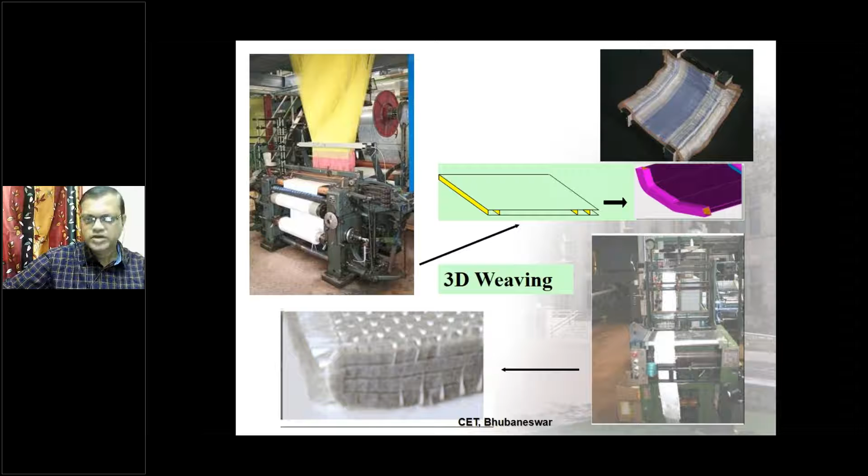These composites offer much advantage over other laminated or unidirectional reinforced composites, because 3D woven and 3D braided composites are anisotropic but can be tailored as quasi-isotropic while being much lighter and stronger than metals.

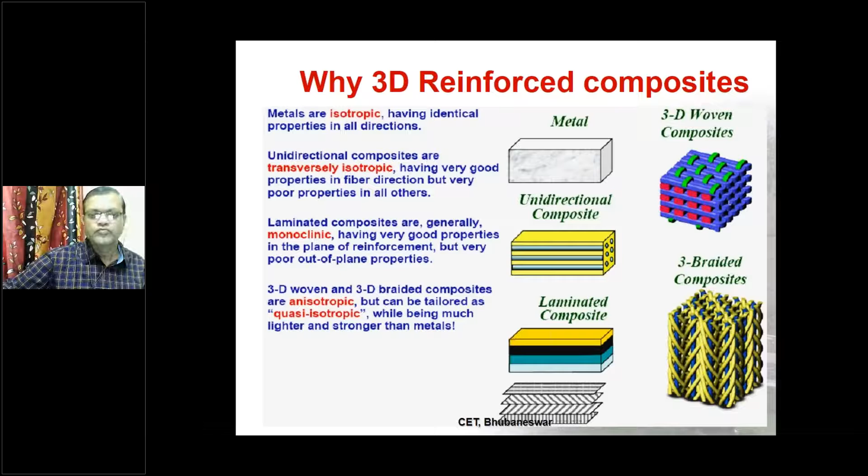The applications of these 3D reinforced composites are aerospace, for making lightweight aircraft bodies; wind energy, for making lightweight windmill blades; automotive parts, such as fiber body cars and two-wheelers, which is definitely an advantage over older aluminum or steel parts; and also pressure vessels, civil engineering materials, marine applications, and sports equipment.

These are some examples of the use of 3D woven composites: panel doors of cars, body of cars, and housing for engines.

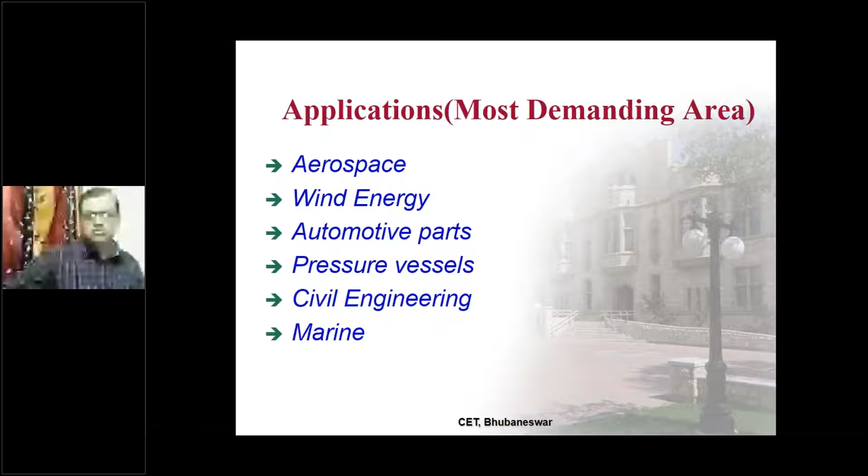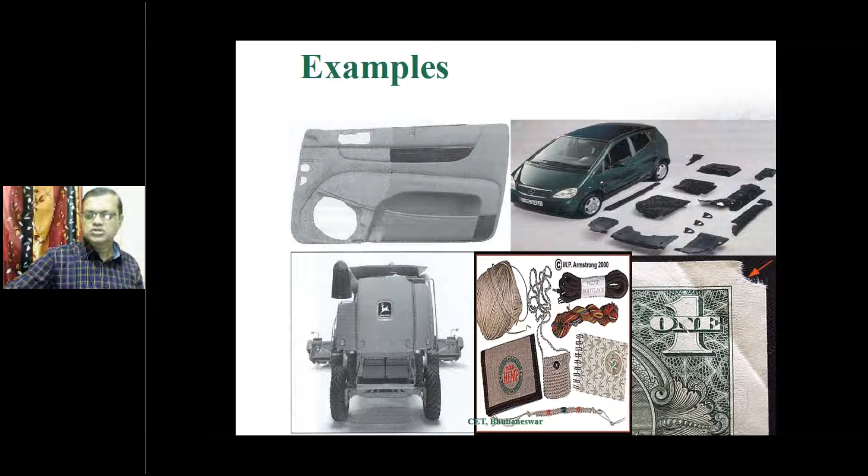So with this we come to the conclusion: the fabric manufacturing industry prepares base fabric for the fashion and apparel sector after using a lot of energy, chemicals, water, and fibers from natural and petroleum resources. Hence, textile fabrics should be produced from eco-friendly raw materials, renewable energy resources, and natural and biodegradable chemicals, so that textile fabrics can be considered a sustainable material.

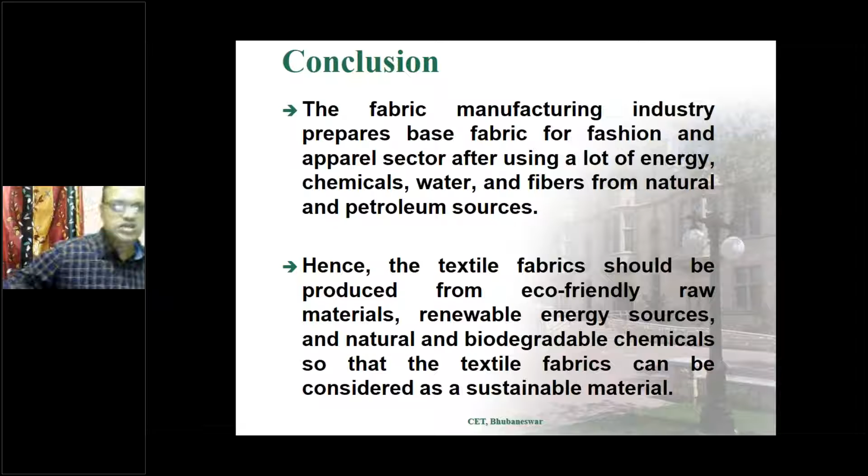So the need of the hour is how this can be implemented. Approaches like consumer awareness, less use, improvement of the product with multiple features, sustainable process design, frequent energy audits to avoid loss of energy, stricter statutory guidelines on environmental norms, and stricter maintenance schedules can help the textile industry achieve sustainability in fabric manufacturing.

And to conclude, I will share my view that fabric manufacturing uses almost 18% of the total energy. However, this is the most important step to add value to the material, because this is the first step of the fabric. Before that, it was yarn; before that, it was fiber. But once it becomes fabric, that's where its journey begins to be served to the consumers.

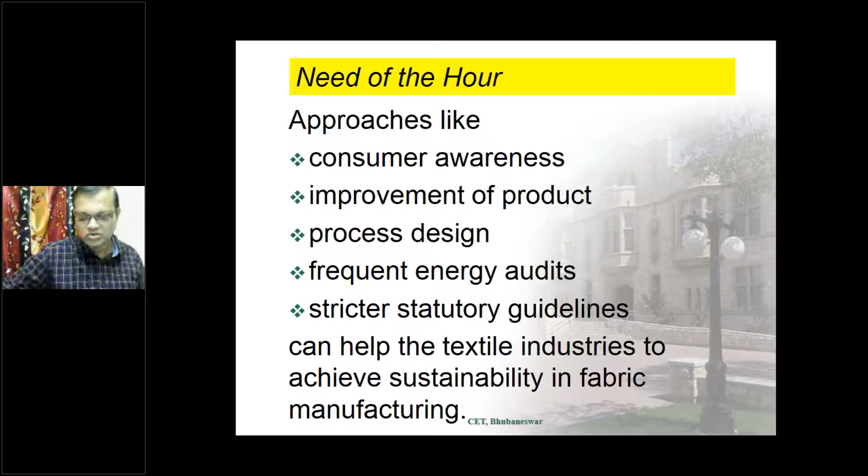With this we come to the end of the presentation, and I feel the participants have gained some insight into how to make fabric manufacturing more sustainable.